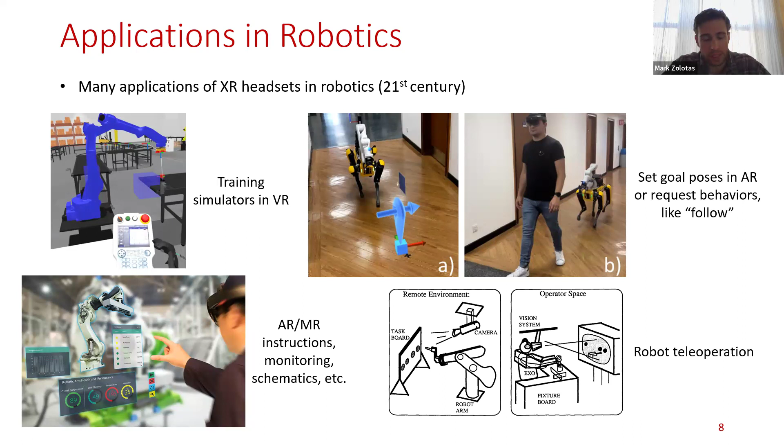Which I'm going to focus a lot on, that idea of having an augmented reality sort of exposition of robots. And I'm going to refer to it quite often as robot to human transparency. And then, of course, another classical application of extended reality in robotics is robot teleoperation.

So before I dive into the main topic of explainable robots, I also want to emphasize that the growth in extended reality has resulted in fantastic tools for easy integration with robotics. So, for example, this video on the right shows how, using a standard robotics visualization tool on my laptop, I was able to edit this hologram of a robot in real time. And so this natural kind of two-way communication process is quite straightforward to create once you've become accustomed to these open source software tools.

So I encourage anyone to explore them, and a couple of review papers I have at the bottom of this slide also give a good overview of your different options when it comes to these tools.

Okay, let me now introduce what I find fascinating about extended reality and the challenge and possibility of making robots, quote unquote, explainable, and how I think this is extremely important for the future of human-robot collaboration. I'm going to use teleoperation as a motivating use case.

Reason being, it's a classic application of human-robot collaboration. It's extremely beneficial for many complex real-world settings, specifically where the robot cannot perform the task autonomously because human supervision is required, like robotic surgery or remote patient care. But another key reason you might want to remotely control a robot is to avoid putting people into situations of risk and danger, such as bomb disposal or space exploration.

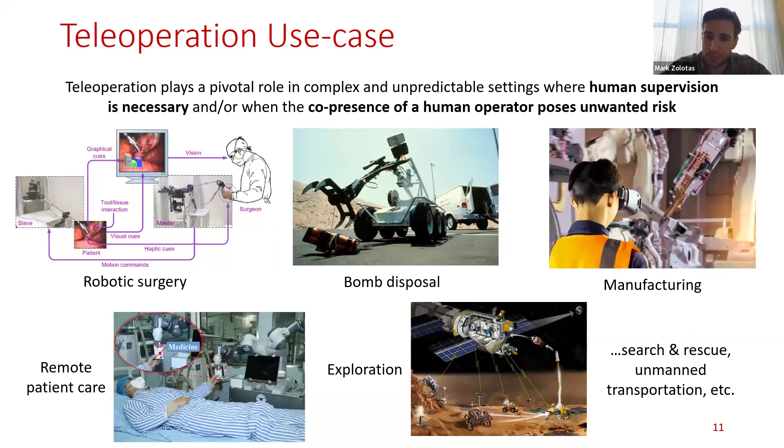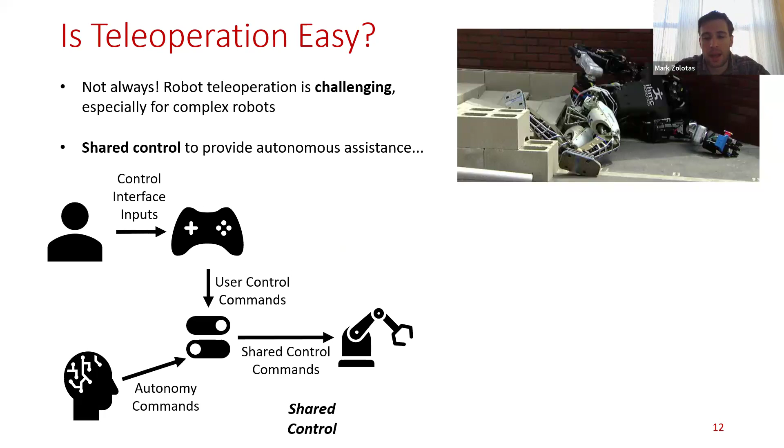So a common paradigm is to think about introducing shared control or shared autonomy. This provides human operators the ability to have autonomous assistance by combining the control inputs that come from a robot's autonomy with those that originate from the actual human operator. The arbitration function in this diagram describes how this blending process takes place. In many paradigms, it's a simple linear weighting of the control inputs from both agents, with this alpha parameter defining how much of the person and the robot autonomy contribute to the final system's behavior.

Now the question arises: does shared control actually pose any new challenges in this collaborative experience? This is an interesting area for me to address. Yes, in fact, most users do struggle to understand the assistance provided by shared control.

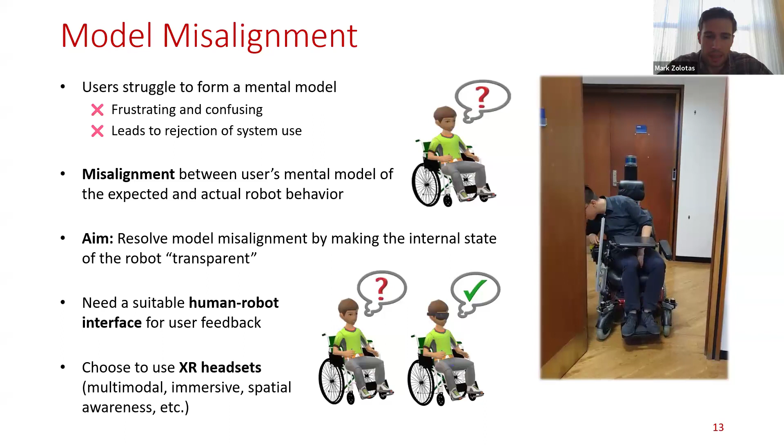In which case, we need some kind of human-robot interface in order to bridge the communication and provide user feedback. I personally believe extended reality headsets are particularly suitable for this need, as they offer a heightened sense of immersion over other types of feedback interfaces like monitors or projectors. They also have rich multimodal sensory feedback capability, be it visual, audio, or haptics. So this is why I advocate for these particular interfaces.

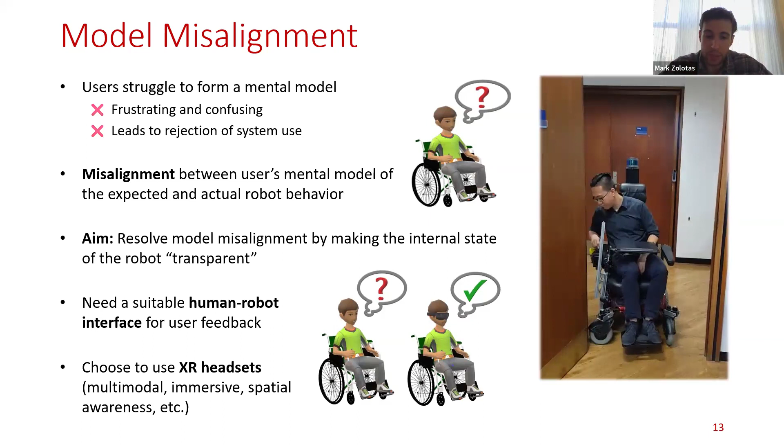As I push into discussing how we can make robots explainable, bear in mind I'd like to emphasize this is a very early stage of development in my research. I think this is a long direction of research ahead of us as a community. But I want to briefly make a few points about terminology. Many of the key terms in the broader literature on explainable artificial intelligence, such as explainability, interpretability, and transparency, are constantly evolving and are often used interchangeably in different contexts.

So I want to make clear, before moving on, that I view transparency as a communication bridge of intent between humans and robots. I think of robot-to-human transparency as the act of revealing a robot's intentions or plans to interacting humans. Vice versa, human-to-robot transparency concerns a robot's perspective of the latent human states, or in other words, things like their intentions and plans. In my view, any robot equipped with feedback mechanisms that can improve a user's mental model of the robot's behavior, whether verbal or visual, falls under my classification of explainable.

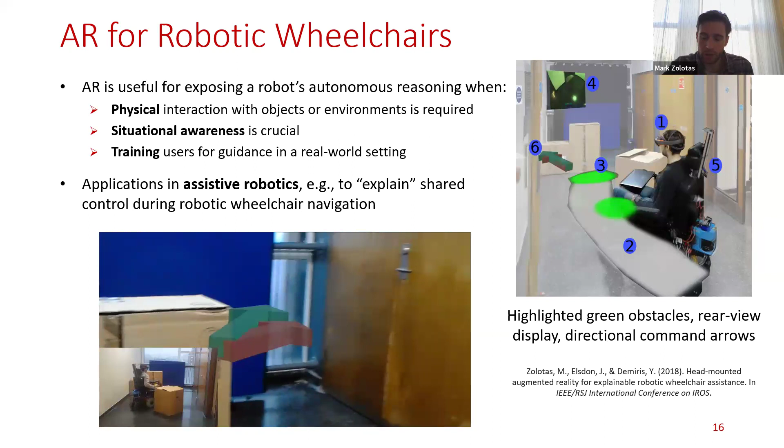That's the overview of the first system I developed. But I want to mention that one of the main challenges in many of these human-robot collaborations, where you're fusing augmented reality headsets onto robots, is the alignment of spatial awareness between the AR device and the robot - in other words, the co-localization problem.

In the robotic wheelchair example, a person is going to perceive the environment at a completely different frame of reference to the wheelchair. So in order to align these two mismatched coordinate reference frames, I extracted, in this particular application, the sensor data coming from the wheelchair, which was basically laser readings, and then processed it as an image.

By doing this, once it's done, only then are you able to have visualizations like these green circles at collision points, or a gray path for the wheelchair's future motion, displayed in the environment correctly relative to the driver's headset view. This is a critical consideration - in fact, one of the main contributions of my earliest work in this area.

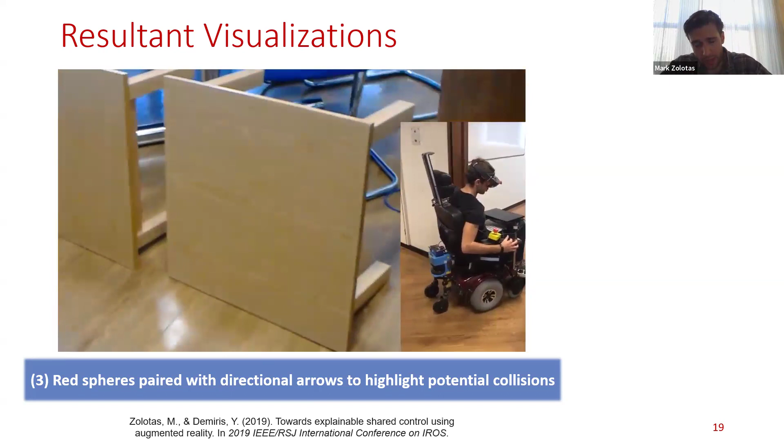An important feature of these spheres was a directional arrow that would signal the location of collisions when the spheres were not in the user's field of view. The overall visualizations ended up being far more effective, and importantly, bringing it back to the idea of model misalignment, it demonstrated that users were able to better overcome typical events that show misaligned models, such as doorways or getting stuck in place.

Okay, after my PhD, I transitioned into exploring virtual reality and other ways of exposing the inner workings of a robot's autonomy. And I started to look at more complex settings than planar robot navigation, like in the wheelchair case. And robot arms are a great place to start because they're challenging for most novice operators to control, due to the fact they have high degrees of freedom and unintuitive dynamics.

The other important thing to note here is that this particular experiment setting I looked at tried to have a robot arm teleoperated in virtual reality to screw in a wooden bolt. These wooden bolts you can see attached to the box on the right. And this required high precision, so this was another reason why it was a great complex task for telemanipulation.

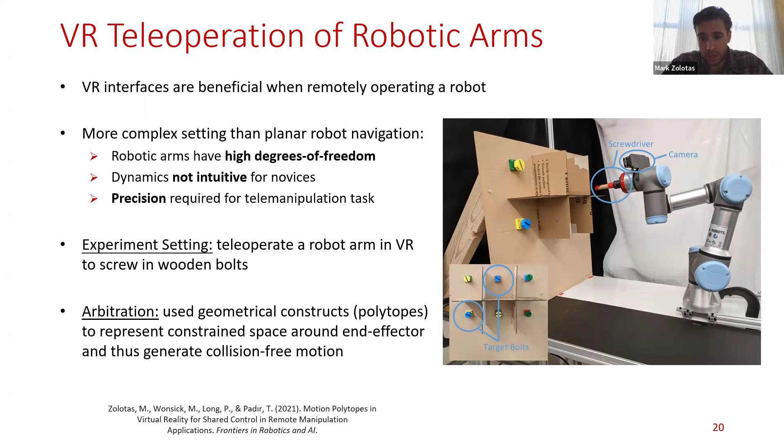In terms of how I implemented the shared control, this is actually work with my collaborator, Philip Long. I'm not going to dig too deep into the technical details of it, but there were these geometrical constructs known as polytopes, which enabled the shared control version of this system to generate collision-free motion during arbitration.

And there were 2 different types of visual cues. But in 3 and 4, the user is actually able to see a third-person perspective of the model of the entire robot and environment. And this is harder to generate in practice, especially when you think about unconstrained environments. But it is usually a way more effective interface option.

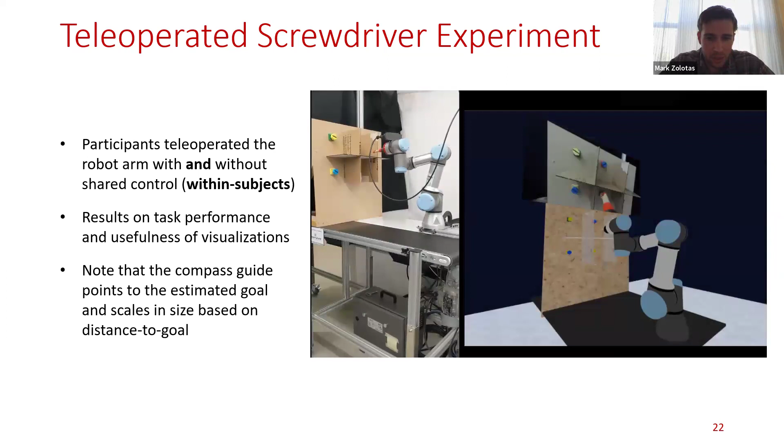But I do want to emphasize that extended reality for robot to human transparency is still a very open research direction, and so there's still many ways to improve the types of user interfaces that are suitable for these applications. So I'm now going to stray away from my research on visualizing a robot's internal states and look at other areas of relevance when using extended reality headsets to enhance human-robot collaboration.

And I'm going to start with the inverse notion of human-to-robot transparency. So far, the focus has been in this talk on humans understanding a robot's behavior and their underlying reasoning. But what about the other perspective of robots understanding a human's reasoning or their latent states?

Now, in my past work, I've investigated this user modeling problem in the context of, say, human intention estimation, such as understanding where does the wheelchair user want to go, as well as in the context of ergonomic posture analysis, so deciding how the robot should hand over a heavy object to a human receiver.

Now, there are many different problems you can explore in this area of human behavior modeling. But what I really want to highlight is that extended reality headsets are especially useful in addressing this problem, specifically because they have multimodal sensory information all contained into this one device. So you can capture visual data, spatial input data on hands, eye gaze, head pose, sort of localization information, a very powerful sensor, really. And you can then apply it to problems like egocentric action recognition.

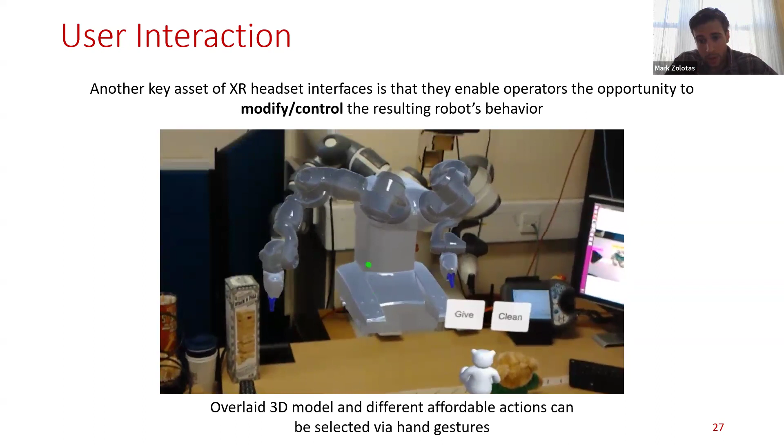So take this video of a robot capable of acting on objects in its environment. By exposing the affordances to a human wearing the headset, and by allowing the wearer to select different behaviors, like 'give me the teddy bear' or 'clean up the teddy bear', the user is then not only able to understand what the robot is doing, but also able to explore the robot's capabilities.

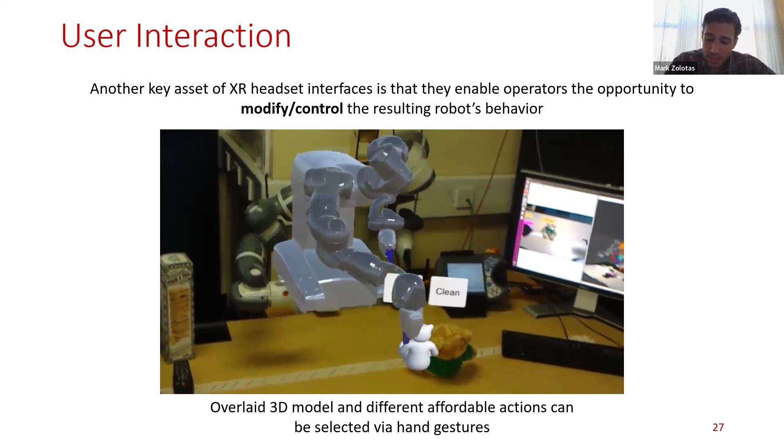So you can either drag and drop the end effector to control where the arm moves, in a sort of kinesthetic programming sense, or you can embody the robot and teleoperate its end effectors. I believe this programmability through extended reality is going to help make robots more explainable, because users will be capable of exploring the robot's behaviors, not just looking at their visual state and how they work, but actually modifying what they do and editing them.

To bring this back to my research on teleoperation, recall that I said earlier in this talk that robot arm teleoperation is generally a complex task, not easy for most users, or at least beginner users. Shared control is a way of introducing autonomy to assist the operator, but it traditionally also gives rise to confusion, ignores the unique preferences and capabilities of different users, and isn't always great at adapting or evolving to task changes.

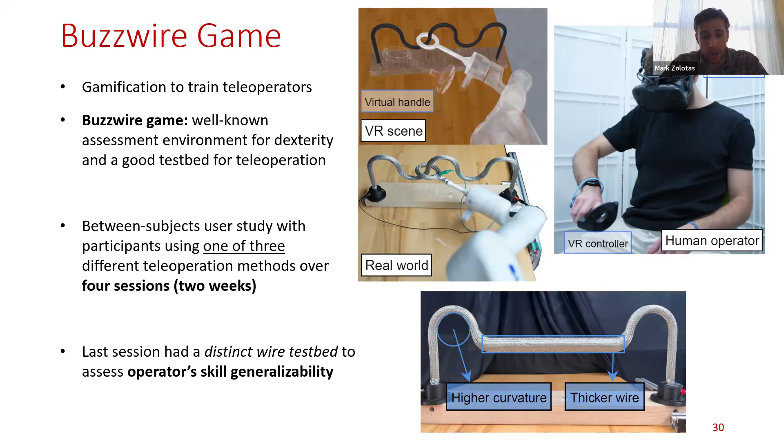The key thing to note is that we wanted to evaluate the generalizability of how well users understood the underlying shared control. So each subject completed the game with a different testbed in the last session — the testbed you can see in the bottom right, which has the thicker wire and higher curvature at the beginning and at the end.

Here's just a video illustration of what the task looked like. The first subject group simply performed the task using direct teleoperation, so there was no shared control.

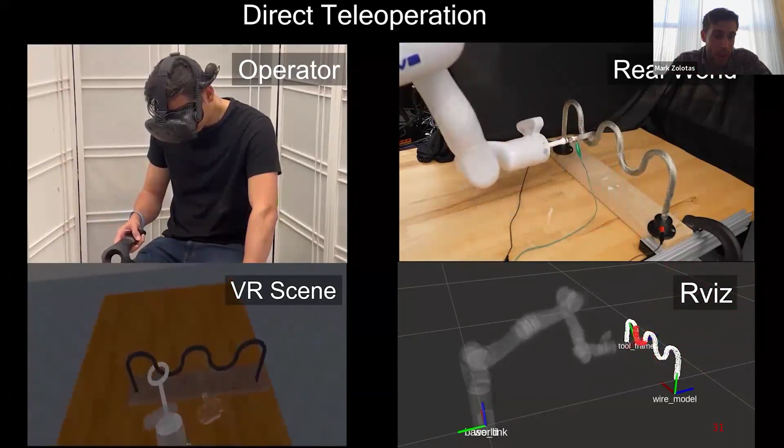You can see the different perspectives, such as the remote operator in the top left, the physical robot performing the game in the top right, and the virtual replica in the bottom left. There's also some feedback there—you can see red lights go off when there are collisions.

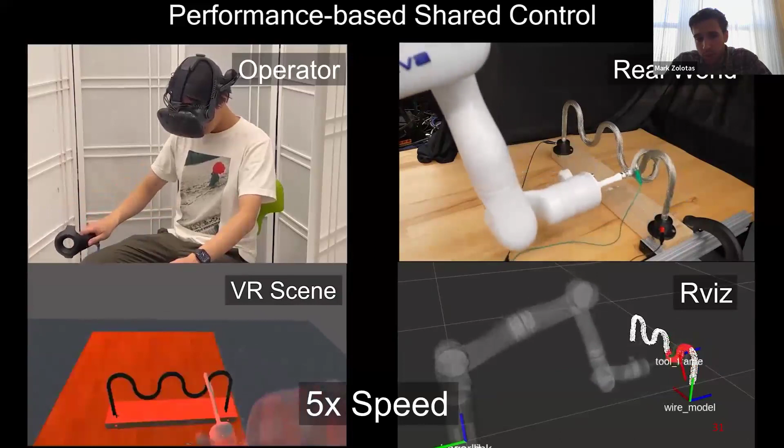There was also haptic vibrations in the controller. The second group was this performance-based shared control, where feedback was provided on how the robot share control worked and what the arbitration looked like, but they were not able to actually edit these parameters.

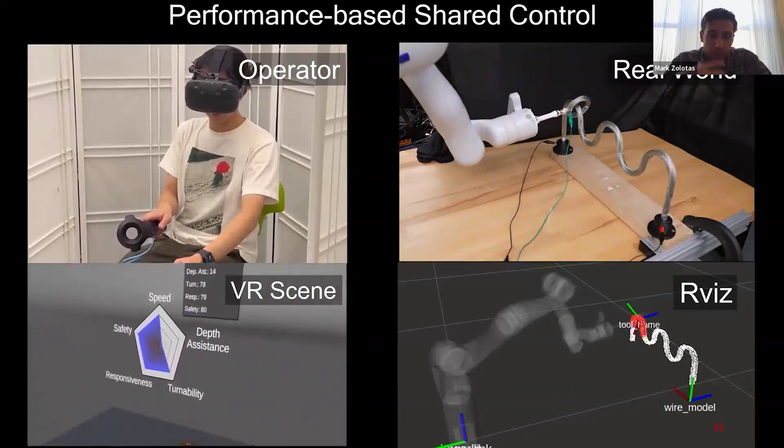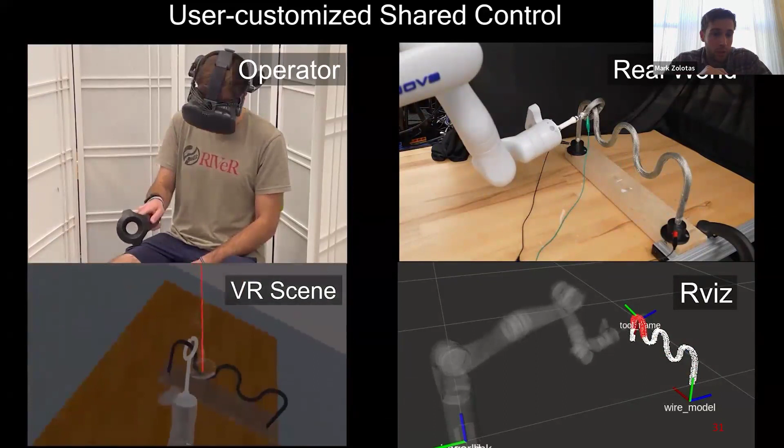And then finally, our proposed user customization method, where participants were presented with the same spider chart as in the previous group, but they were also able to actually edit the parameters according to their preferences. This was the one that we found had the most interesting findings, as I'll show you now.

As one might expect, in the baseline session, where everyone was just trying out the robot for the first time, we found that the performance-based share control method had the safest performance but the slowest times. However, the direct teleoperation had the fastest completion times. This is something that's typically found in the literature on teleoperation.

What was interesting is that the user customization group started to have far better improvements in performance across sessions, with the least number of collisions and fastest times in the final transfer session. These results generally hinted in favor of a more generalizable skill set for users when they were able to customize the robot's behavior.

I'm not going to dig into the specifics of these different arbitration parameters, but you can consider them as factors relevant to the specific buzzwire task, as well as the general idea of skill in robot teleoperation, such as don't crash into obstacles.

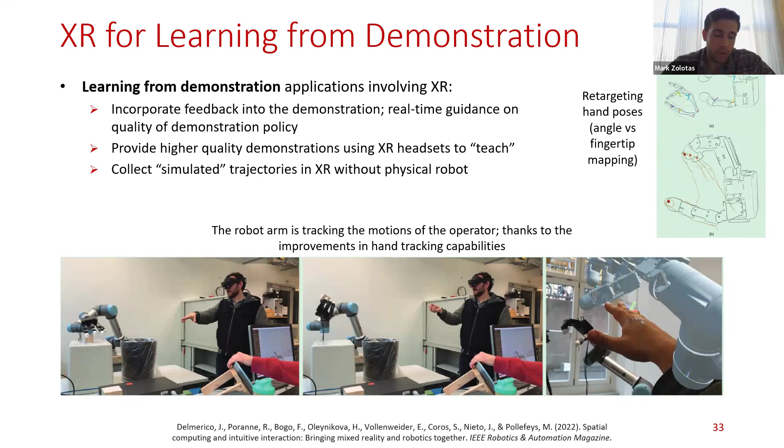So that concludes my talk. Let me reiterate that I mostly covered the topic of the robot to human perspective on this problem, but I generally believe effective human-robot collaboration requires explainable interactions.

I think bidirectional communication of an agent's intentions is vital here. Extended reality headsets are just one medium of communication that I found especially promising in improving a user's mental model of the robot's behavior.

But I also believe these headsets have the ability to improve a robot's awareness of the internal user states. I think there are many interesting open research questions to continue exploring, like how do we actually define and evaluate model misalignment between a user and robot, or what is the best sensory feedback for communication?

Is it the visual audio channel? Is it a combination of many modalities? Finally, the direction I'm most fascinated by is the idea of studying the interplay between how the internal models of humans and robots adapt over the course of a task.

If a robot's model of a user is updated online, and the user can actually visualize these updates, will the user and robot co-adapt, or will a conflict begin to arise? I think resolving the potential for conflict by better understanding this mutual model adaptation process is going to be crucial in terms of long-term human-robot collaboration.

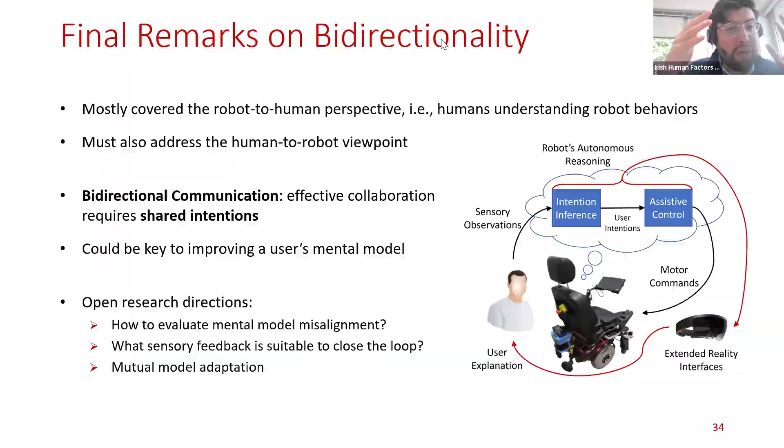Can I just ask a question following up on Chiara's question? In that experiment, they found teleoperation of the cobots challenging, because the robot being controlled remotely has to be connected to the same network. It's telerobotic, but also kind of local, so everything has to be local. How far are we from actually doing telerobotic controlling, but from outside local networks?

That's an area I don't think I have enough expertise in. I have done some work going outside of local networks, but you end up needing a full communication team to accommodate this. I've been in touch with networking people who said the state-of-the-art capabilities of 6G and next-gen technologies should support the fidelity and reliable communication you'd need. This is an area of research I've briefly encountered, even in areas like shared control, like how to have autonomy kick in when you have a loss of communication between the arm and the operator. But in all cases, it's not something I have expertise in. I think it's necessary to have a team of experts addressing this, but it's definitely not my area of expertise.

Okay, no problem, but thanks a lot. I really appreciate your insights. Okay, so is there any other questions from the audience?

Hi, hello, Philip here. Can you hear me? Yes, we can. Mark, thank you very much for the presentation. I have a question about the type of feedback provided between the human and robot agents, and the different setups in your research. Teleoperation assumes there's a disconnect, remote operation between both agents, versus when they're both collocated in the same location.